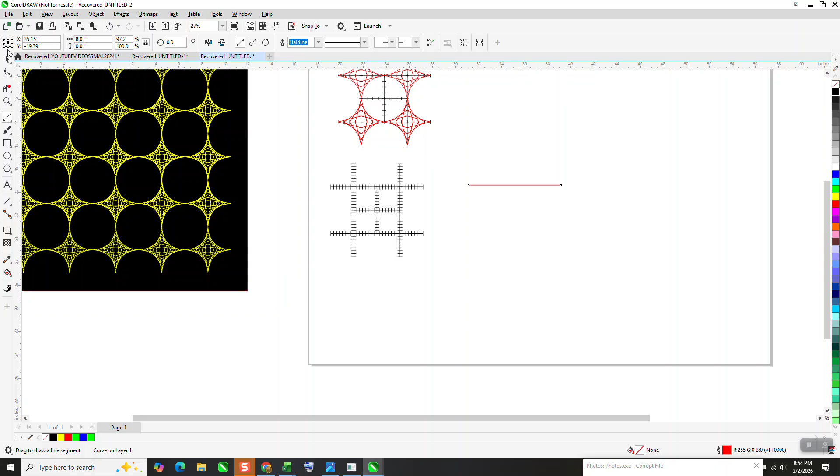I'm going to take a 2-point line and make it 8 inches. Then I'm going to draw a little bitty click, just a hair, really small. Then I'm going to shift select that, which is going to be our path. I'm going to go to Object, Fit Object to Path, and pick 32, which sounds like a lot, but it's really not.

That's pretty cool. Now Control G to group it. Put your nudge factor on 4 inches, because this is 8 inches long and we want the next one at 4.

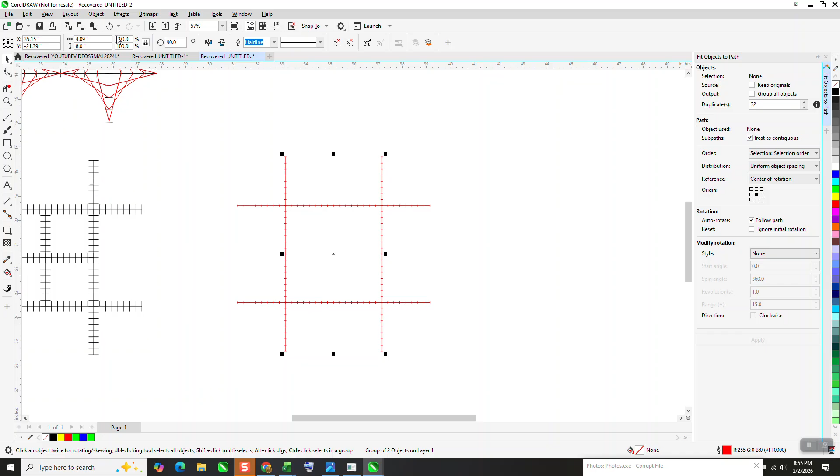Control D to make a duplicate, and rotate it 90 degrees. Now I'll Control G to group it - actually, I don't want to group it yet. I'm going to make a duplicate of this one and move it over. But then I'm going to take this one, and this one's going to be my center line.

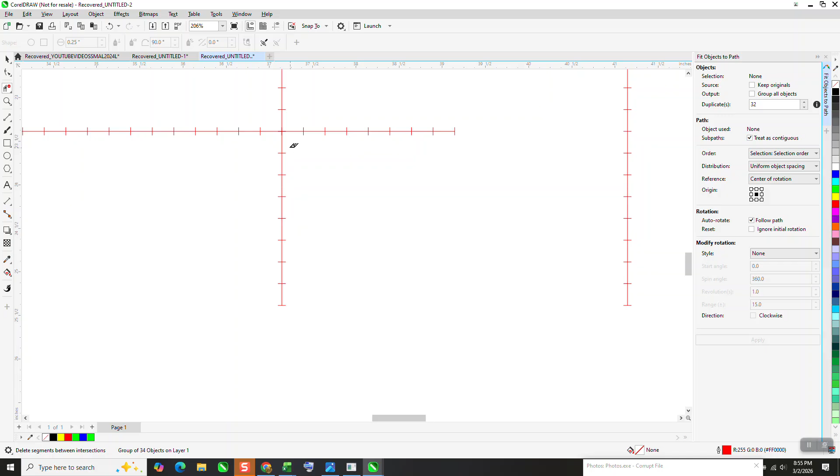I'm going to get the virtual segment delete key and delete that line - only have to do it once. Virtual segment delete key, and I don't have to delete that, but I am.

Now I'm going to set my nudge factor on 2 inches, which is going to split that in the middle, and I'm going to move that over 2 inches. Then Control D and rotate it - it's already at 90, so I'll rotate to 0.

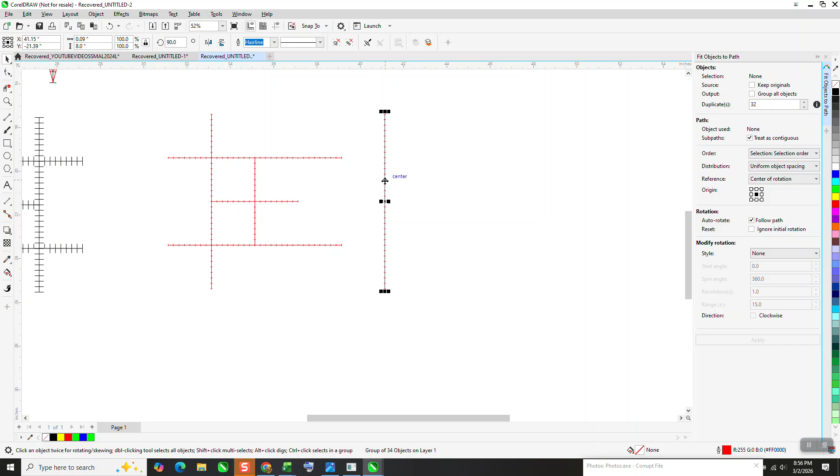I don't really have to put this one back because I don't need it, but I think you'd be better off if you understand how to do that. I'm going to Control G to group it, and make it black just so we can see. All we're really going to use is this part right down here.

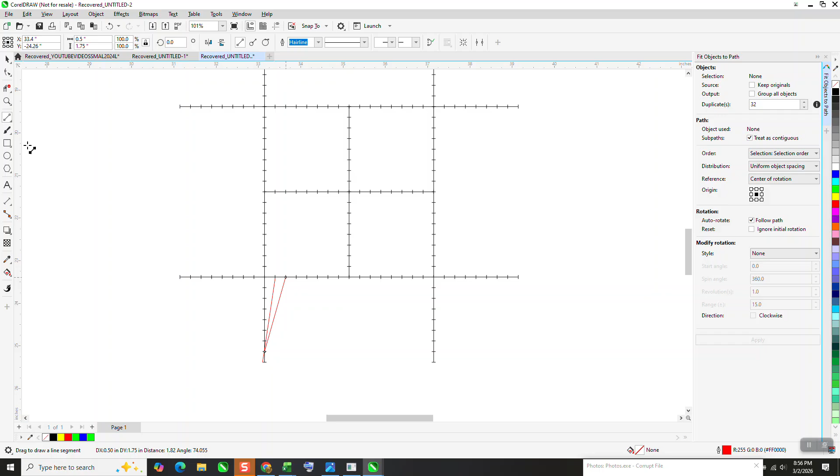To make it even, I'm going to draw in a red hairline, from there to there - make sure you go from the center to the center. I'm going to zoom in a little bit, and see, I'm even off on that very first one.

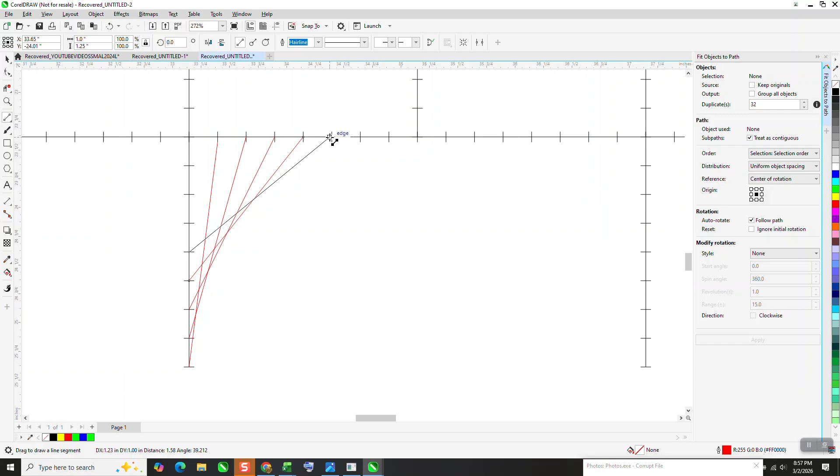If you get off, you can always grab your shape tool and put it there. Back to the 2-point line. So what I'm doing is kind of creating a curve, if you do them right.

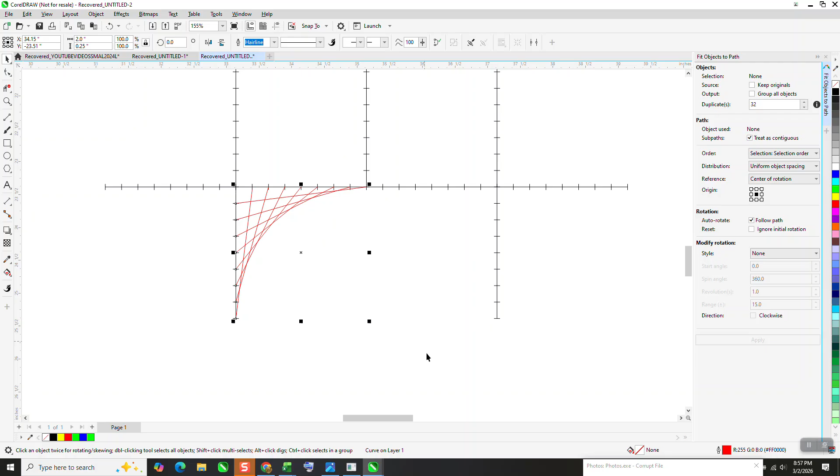And that's it, really. Now everything else is grouped together, so I can select this and Control G to group it, Control D to duplicate, get the 2-sided arrow, and go there. Control G to group it, Control D to duplicate it, get the 2-sided arrow, and you're there.

Control G. Now our nudge factor is 2 inches, so hit the plus key and move it over twice. Grab these two, hit the plus key, and move it up twice. Or you can change your nudge factor.

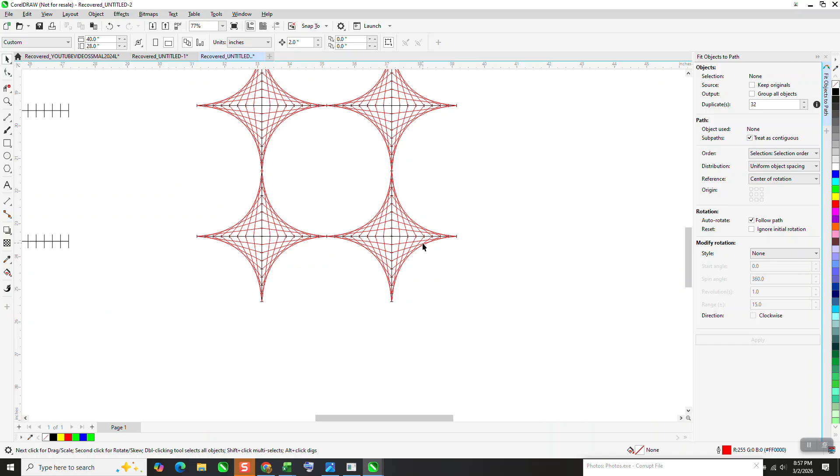You know, maybe I didn't group those lines together. Very easily, let's change our nudge factor to 6 inches, and let's nudge - you can see I've got red selected. I can nudge all this out of the way to get rid of my lines.

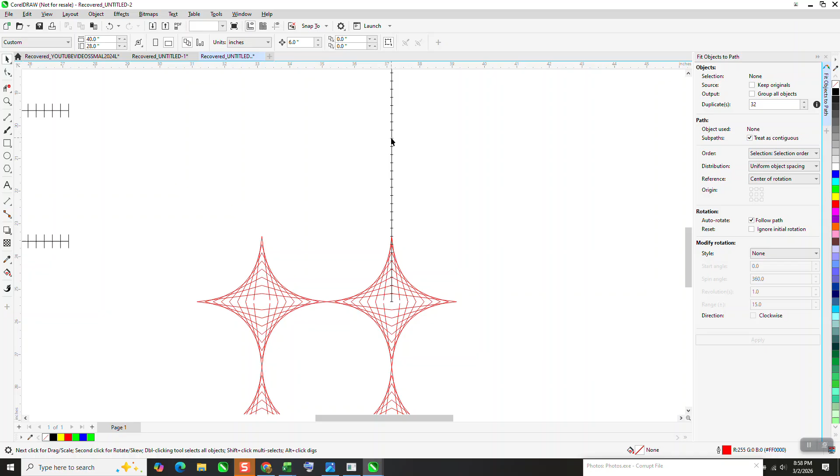And look at that. Now, the good thing about this, you could do more with this. And you know, somehow I'm not touching - I did something off. Well, I've already deleted it.

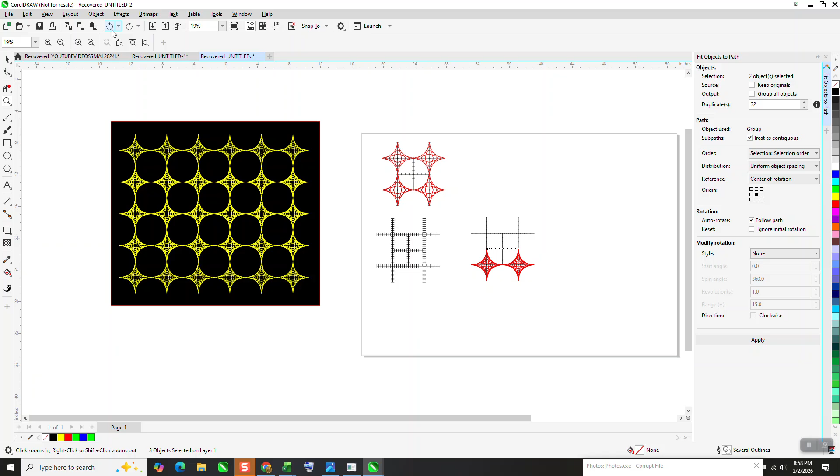See, I'm touching there. You know, it didn't take just a second. Let's back up here - what did I not do? Oh, you can see it right there.

That's one - I'm trying to figure out another thing to do besides a dash.

Okay, I grouped together, so we're going to have to grab it and ungroup it. I just got in a hurry and didn't pay attention. Okay, that's still grouped - each side was grouped. It's a good thing to group things, but sometimes when you want to change it...

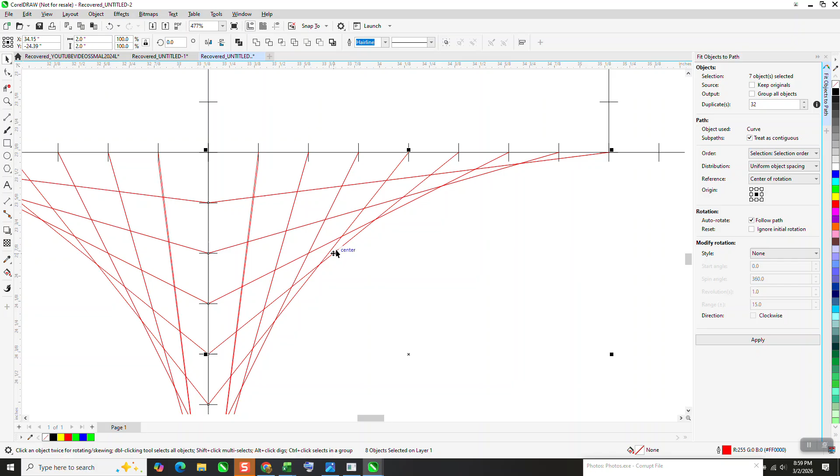So see, I just didn't get that line to that. Okay, whenever you can't grab it with the shape tool, you've got to ungroup it. And I don't have a line in the middle. Okay, now it should work.

And once again, I didn't delete - I didn't group it, which would really help you, and I don't need them anymore. I know what the nudge is. Control G, Control D, and move it up. Now my lines meet.

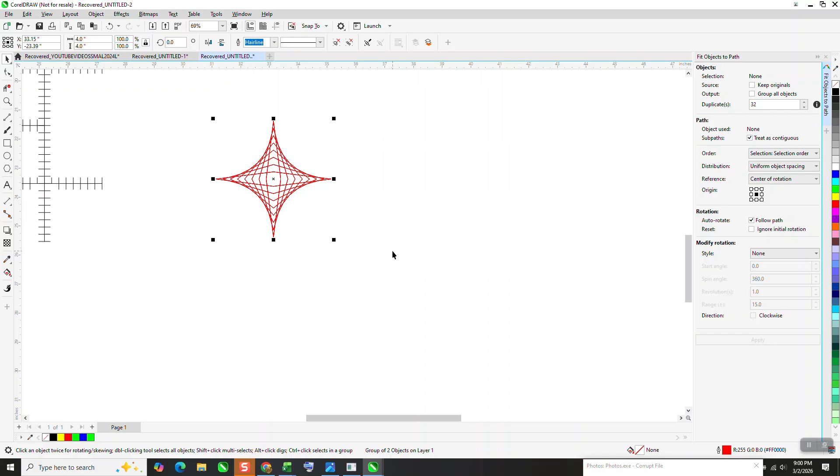Control G, Control D. Control G, Control D - you don't have to group them together, but there you go. Now we're still 8 inches apart. So Control G, and we could change our nudge factor to 8, or just leave it there.

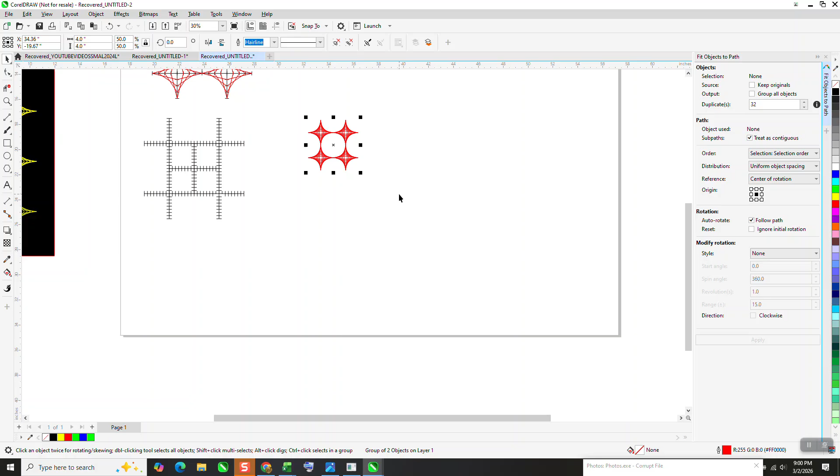You know, let's make this whole thing smaller. With my ratio locked, I'm going to make it 4 inches instead of 8. So now I'm going to change my nudge factor to 4, and I'm just going to hit it. And look at that - and as many of those as you want.

And you could put another graphic in the center. Let's look at this - I'm going to right click yellow, bring in a black box. Pretty cool effect, and really pretty easy.

It might even be an easier way to do it than the way I did it. You could maybe just start with a 4-inch line and just put dashes. Now that I think about it - but when I was trying to figure it out, I wasn't.

And you could go more, and you could put stuff in the middle. Anyway, I hope that gave you an idea or two, and thank you for watching.